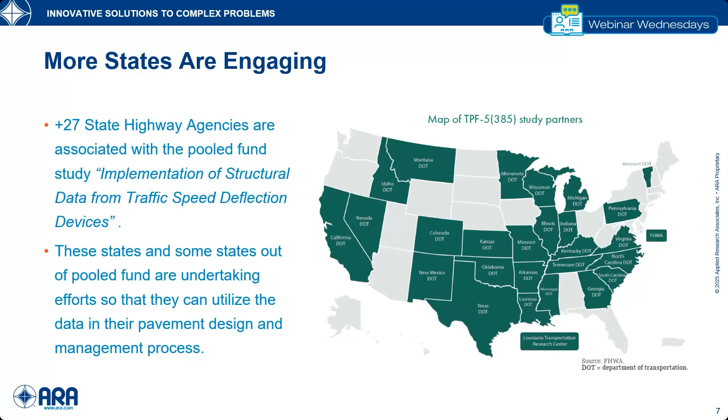So TSDD, the pooled fund study is out there, and many states are now engaged with the pooled fund study to use the data for different purposes, mainly for network level and structural evaluation of the pavement to support pavement asset management, and also investigating ways to support the pavement design processes. Many states have already joined the pooled fund, and other states are investigating the capacity and possibility of using the data for different purposes, including those states outside the pooled fund.

ARA is now providing TSDD data analysis support in different states. In Texas and Georgia we have provided support, and Illinois, Ohio, and Michigan DOT are ongoing projects that we are dealing with.

Before going to the data applications and use cases of the data, I would like to go over a couple of fundamentals of the TSD data, basically to make sure we understand the TSD data properly. A brief introduction on those aspects. Deflection data. We are looking at two cases here in these slides.

In a case study in Illinois, we are looking at two sections of the same road, a few miles away from each other. On the left side, we are looking at a distressed section, but not as distressed as the screenshot on the right side of the slide. If we look at the deflection and distresses in these two sections, we'll learn more about the structural capacity of these two sections.

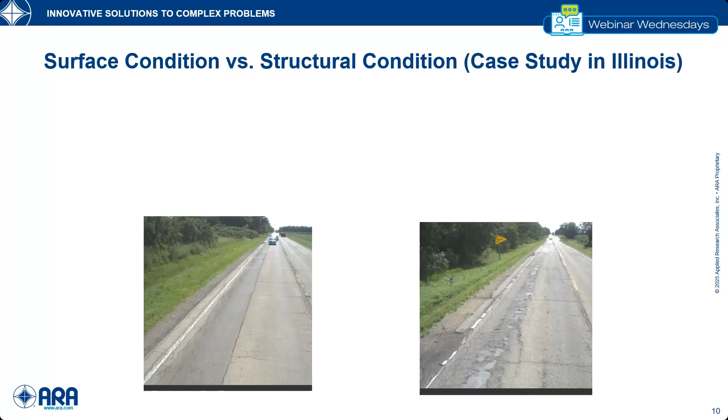So the maximum deflection is on the top of the slides for these two sections. The section that is more distressed, on the right side of the slide, actually has a much lower deflection value. And the section on the left side, with a better surface condition at least, has indicated significantly more deflection, more than 10 times actually.

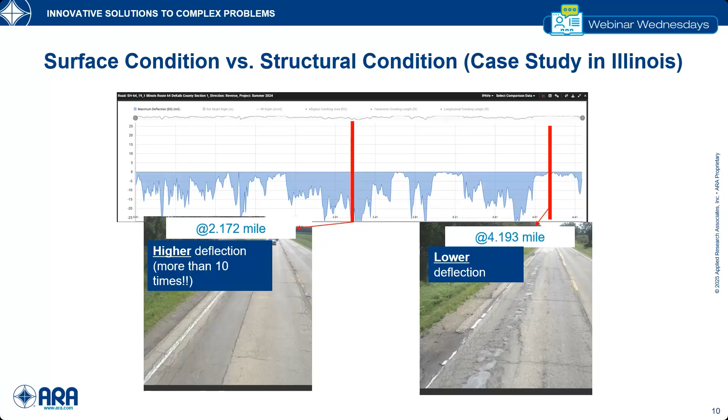So in summary, the surface distress, as we all know, doesn't tell the whole story about the pavement structure within the depths of the pavement. So it's really important to look at both deflection, structural information, and also surface condition. But how is the data measured, how is the data reported, and what does the TSD data mean?

Traffic speed deflection devices, such as the TSD that we are looking at in these screenshots. There are different TSDDs by different vendors available in the US. We are looking at one example here. It is basically collecting the deflection-related parameters of the pavements. There are Doppler lasers installed that beam near the truck rear axle, on the right side of the axle, and it is actually measuring the deflection velocity data.

And in this specific equipment that we are looking at, there are multiple parameters that are also calculated and reported, such as the surface condition data coming from the LCMS lasers, and other information such as the right-of-way images, all integrated into a platform called Hawkeye. This information can then be used for different purposes.

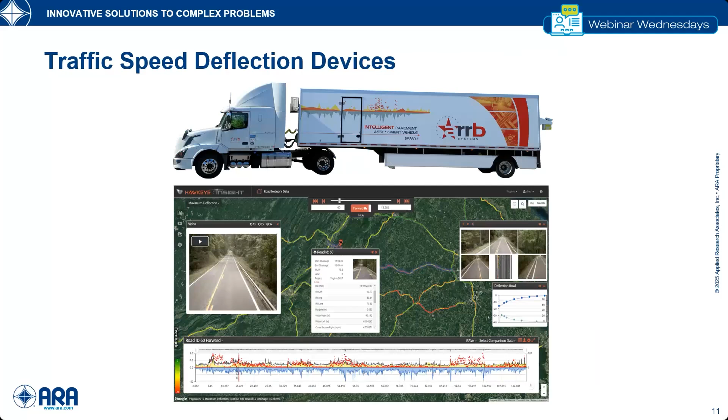But let's take a little deeper look at the data and how deflection slope is measured and reported. TSD or TSDD measures deflection velocity, the speed of the deflection that is happening under the load on the pavement. So TSD doesn't measure deflection directly. Deflection velocity is measured from the TSD, as in the screenshot on the bottom of the slide. The Doppler laser is measuring the velocity in the vertical direction, and there is another component, the horizontal speed or vehicle speed of the moving truck.

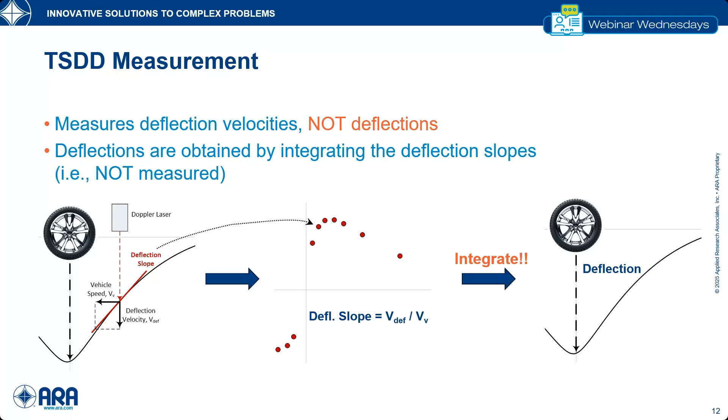And then the slope of that deflection basin is considered the deflection slope, which is the deflection velocity divided by vehicle speed in the horizontal direction. Then, using some assumptions and a mathematical approach, there are ways to come up with the deflection basin, to provide an estimation of the deflection basin. But looking at the raw data, deflection velocity and deflection slope, what does it tell us and what do we expect to see from the TSDD measurements?

Here we are looking at the typical or expected deflection slope and deflection basin on the top and on the bottom of this screenshot on the left. Our expectation is to have a positive deflection slope in front of the axle and a negative deflection slope behind the axle. The reason is that we expect lower deflection values far away from the axle, far away from the load center, compared to the closer offset.

And what if the deflection is not showing this expected shape? This can be one example of unexpected deflection slope, with negative deflection slope in front of the axle. But what does it mean? If we use our imagination, the negative deflection slope translates into non-decreasing deflections, theoretically, meaning that deflection far from the load has a higher magnitude than deflection at a closer offset to the load center, which is not expected. It can happen for several reasons.

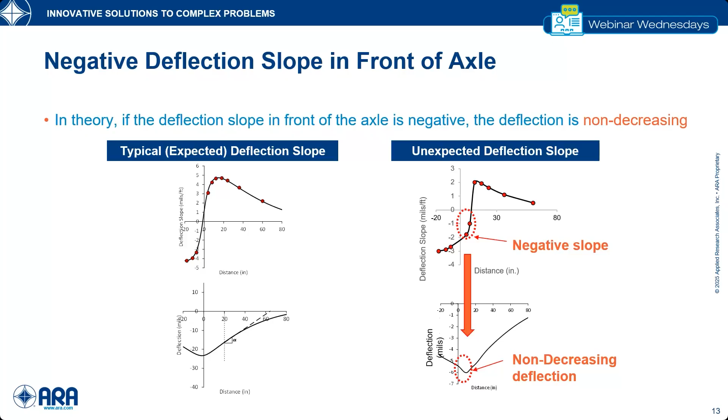So with that brief background about TSD data measurement, the fundamentals of the measurements, and how data is reported and integrated, we took another step to devise a quality assessment protocol to evaluate the quality of TSDD data. I'm showing the ARA proposed process for TSD data quality check and quality assurance. The first step starts with the linear reference check: whether the data collected are tied to the inventory of each state and that referencing is done correctly, meaning road names, lane, direction, and all GPS information are correctly reported and tied to the data. That is really the basic step to make sure the data is reported at the correct location.

The next step starts with reviewing the raw deflection slope. Since the deflection slope is really the raw data coming from the TSDD, we put high emphasis on reviewing the raw data directly. Our steps start with simulating different pavement sections to get the deflection slope for different case scenarios, comparing the raw and calculated deflection slope reported in the database, and using that information to identify unexpected slope shape and value, both in terms of the shape of the responses and the value of the response.

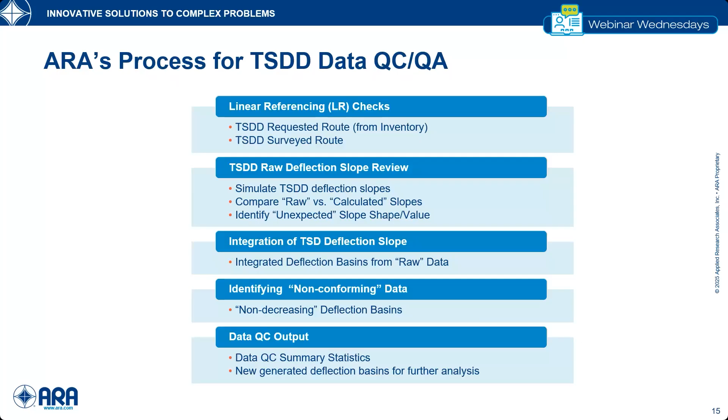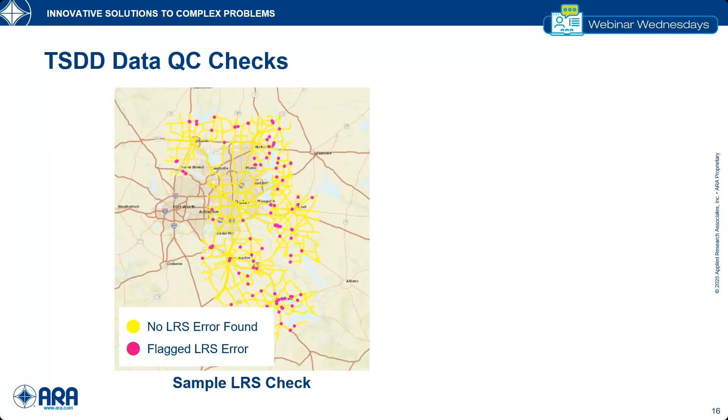This is showing one example of those kind of checks. Here in this picture or screenshot, we are looking at the linear reference checks and issues, flagging the entire area that was tested in this example, with pink points showing the flagged areas or potential errors, and yellow points or yellow lines showing where we didn't observe any errors. By those errors, we're referring to if the road names, milepost, lane, direction, and other location features are mismatched, and there is a discrepancy between what was supposed to be collected versus what was collected, to identify those flags and recommend correction or further adjustment.

By unexpected data, I'm not referring to right or wrong. Really, what matters here is whether it follows our expectation. What we expect from the data, and the data shown is not really following our expectations. So this is an important step towards increasing our knowledge about the TSD data itself.

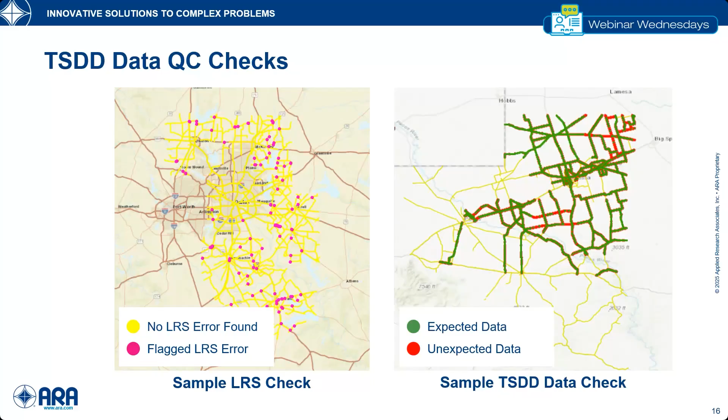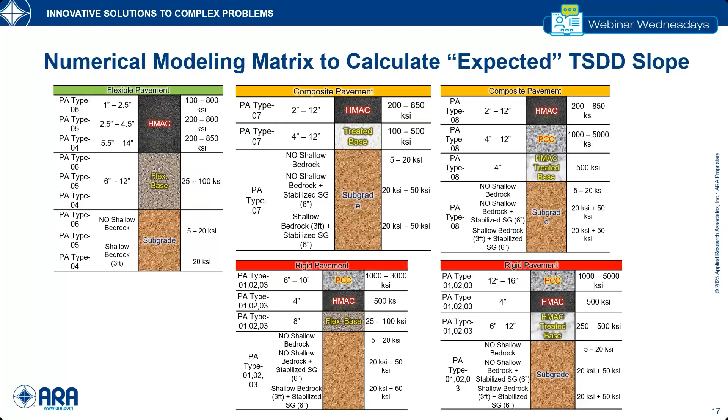This slide, I'm not going to go through the details, but this shows one example of the numerical modeling matrix that we use to calculate those expected TSD slope data. We used different pavement types with different ranges for different layers, different thicknesses, different layer moduli for different layers of flexible pavement, different types of composite pavement, asphalt over concrete, and different rigid pavements were simulated, a relatively wide range of cases to consider both extreme cases, lower end and upper end of those kinds of spectra, to capture both cases and come up with values that can be within the expected range of the deflection slope response. Then that would be used for checking against the deflection values.

This slide shows one example of the TSD data checks I was performing in Texas. Different QC checks divided by main category and subcategories in terms of if sensor recording signal, if raw data was not corrected or was the same as calculated data, expected the slope shape, if the slope shape in front of and behind the axle is showing as expected, and deflection value coming from different ways and approaches, from the area under the curve, from ARRB method, Greenwood method developed by Peterson, or the deflection coming from integration from raw data, and also information on the temperature of data collection, if it was within the accepted or instructed range, and at the end, what portion of the data is conforming to our expectation. In this example, 96.8% of the data were within that conforming range of values.

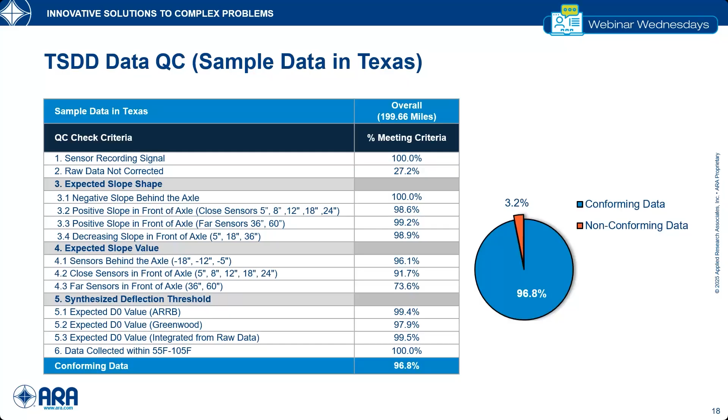TSD raw data plots. There is an ongoing development here to visualize the quality checks. Once we do the quality checks, how can we visualize the data? This is really the preliminary step of this task, an ongoing initiative at ARA for showing the data. In this example, we are looking at the blue data points, TSD raw data points that we didn't identify any issues with, and orange or red data points with some sort of possible issues that didn't pass our QC checks. So the main purpose here is to look at the details of each pavement and each roadway type, using those design drop-down menus on top of this tool or plotting system to identify the source of possible error in that specific roadway, to guide us in understanding the data.

So really the next step of this entire initiative is to put this information in a platform that we can look at, go to that specific data point, and identify the location with right-of-way images, with other information coming from the Hawkeye system, merging this information together to find the areas that can be problematic or can have possible errors, to guide us to better understand the data in a more meaningful way.

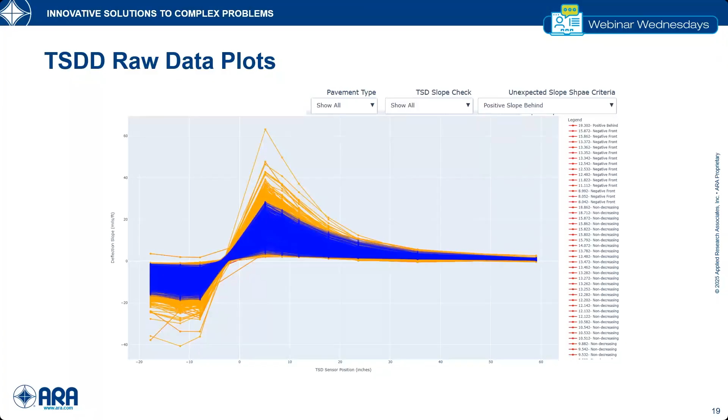Incorporation of the TSD data into pavement ME design is another initiative that we are following. It's really at the early stage.

TSD data has been used for network level pavement analysis in many different cases. There are some applications of TSD data for project level analysis, however there are limited cases and examples. There is no standardized approach to use TSD data with pavement ME design for project level analysis. That needs a lot of investigation and calibration or adjustment to the process to address the unique features of the TSD data. The loading mechanism and processing process are completely different from other NDT approaches such as FWD. That needs to be captured and properly addressed when we want to use that approach.

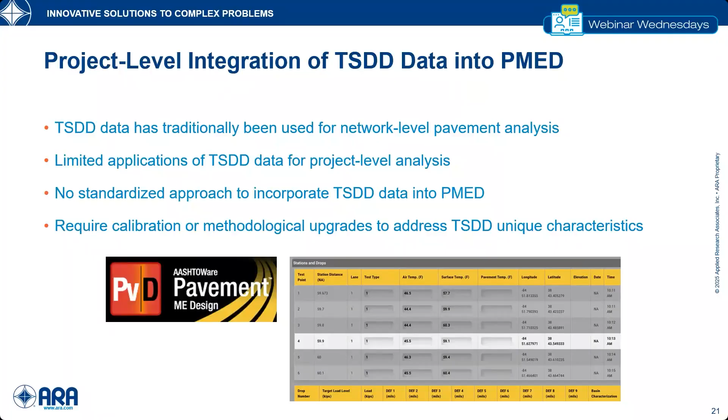But we did a preliminary comparison to see how that can be used, and what is the possibility of this. We used different approaches using pavement ME back calculation tool, modulus software, and ELMOD software, to explore the feasibility of using different tools for back calculation of TSD data and compare it with FWD data.

The first bar in this chart shows the FWD back calculated modulus using modulus software. This specifically shows the back calculated subgrade layer modulus. We want to show how they compare for subgrade modulus, which is an important parameter in different designs.

We are seeing the data is really different with different methods used. We are looking at a very high range of changes using different methods. With TSD data, the back calculation tool versus modulus versus ELMOD, they are really different from what we observe from the FWD back calculation modulus.

We tried to refine the data again and use the data another time, performing the QC first. So this slide shows the result before doing the quality checks, and then we repeated the analysis but with performing the QC checks. The results were in better agreement with FWD, not exactly the same, but we could see better agreement for that specific case study.

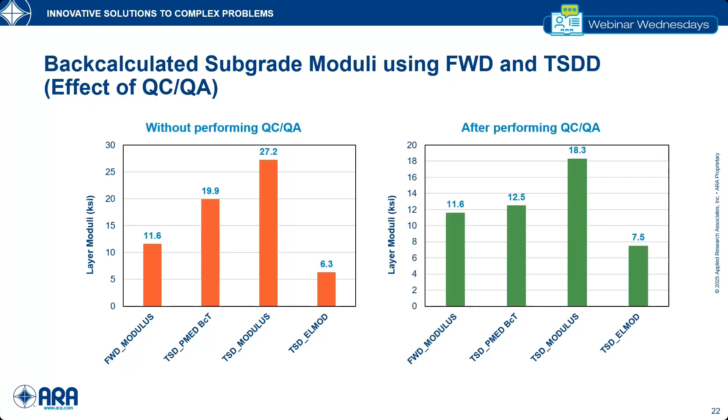To further advance the back calculation, we took the challenge to take it to the next step of how we can specifically consider the features of the TSD, the dynamic loading conditions and different sensors that we have, 11 sensors in the newest version of the TSD that we have used, and how we can consider that information as well as viscoelastic behavior of pavement and other frequency and temperature dependent parameters of the asphalt layers or flexible pavement layers.

So our TSD expert at ARA, Hyung Lee, developed a tool called DSteele, which is our in-house tool for performing that calculation. This is still being upgraded by Hyung, and we are seeing a screenshot of this tool here.

Basically you can define your pavement structure, different layers and different thicknesses with different parameters and coefficients to capture the viscoelastic parameters, with deflection slope calculations, deflection velocity calculation. So it's pretty dynamic and pretty efficient for doing the calculations of the responses under TSD load.

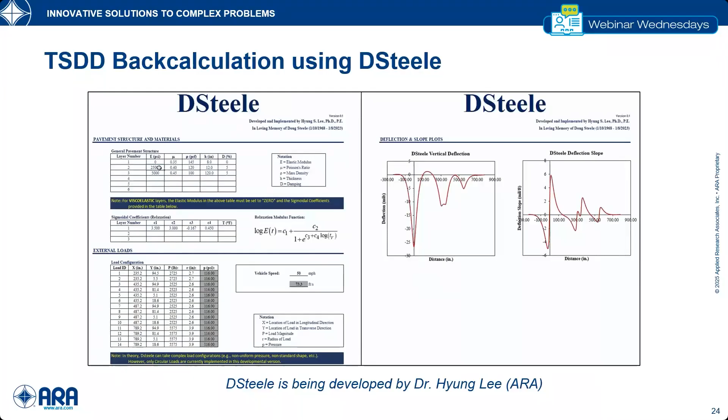How can we use TSD for back calculation? First we need to understand how the data and deflection slope is provided to the end users. There is deflection slope, although it's called raw, it's not 100% raw. There is a sensor reference measurement that is roughly 3 meters away from the load center line, 121 inches. That measurement is subtracted from all other deflection slopes, and that is reported as the raw deflection slope to the end user. So that is the deflection slope reference that we are going to use.

So the purpose is really to find the matching layer modulus for that defined pavement structure, to get the matching responses from TSD or from this modeling versus what is reported or what is measured.

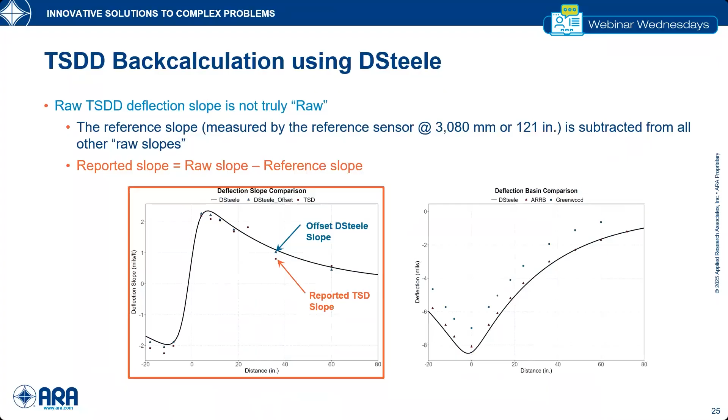In the plot on the left side, we are looking at that kind of process. We are looking at the deflection slope that is offset deflection slope, which is equal to deflection slope at that specific sensor subtracted from reference slope. The purpose again is to get them as close to each other as possible. In this example, this has been done for deflection slope and deflection basin, and our deflection data showed better agreement with the DSteele simulated or back calculated deflections versus the other approach, or Greenwood deflections that is reported.

Looking at further details, back calculation versus integrated deflections, we look at a couple of sections in one case study in Texas, examining two different types of sections. The first example deals with a less stiff, less robust pavement structure and thickness, looking at how integrated deflection compares with the back calculated deflection.

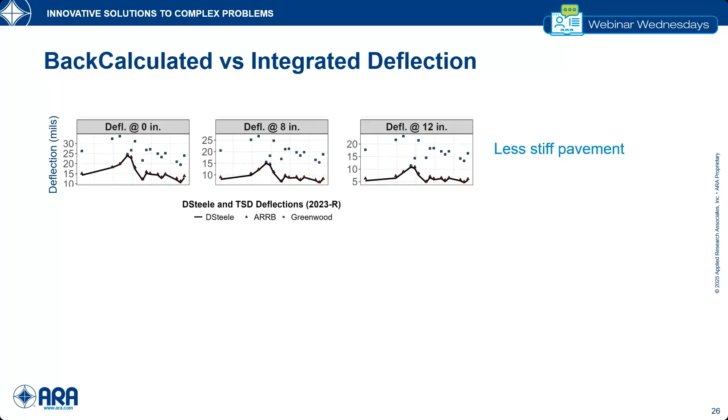Again, we are seeing better agreement between the deflection from ARRB with DSteele back calculated deflection. In a stiffer pavement, it was a little different trend. It was more challenging to get matching deflection from what is back calculated at this stiffer pavement, and it was the same type of situation for both ARRB and Greenwood.

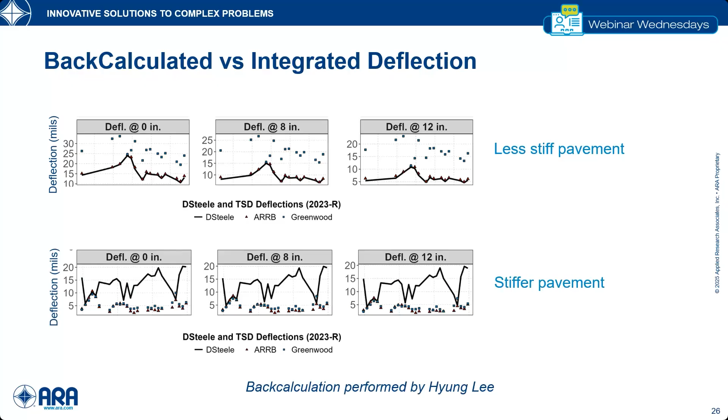The back calculated deflection really didn't match with what was reported. Another example of back calculation, based on mileage, where we had both FWD and TSD data, looks at base layer modulus, flexible base back calculated modulus, and subgrade soil back calculated modulus. The blue points show where we had TSD data, and orange points show the FWD back calculated layer modulus obtained from modulus software, with TSD back calculation done using DSteele.

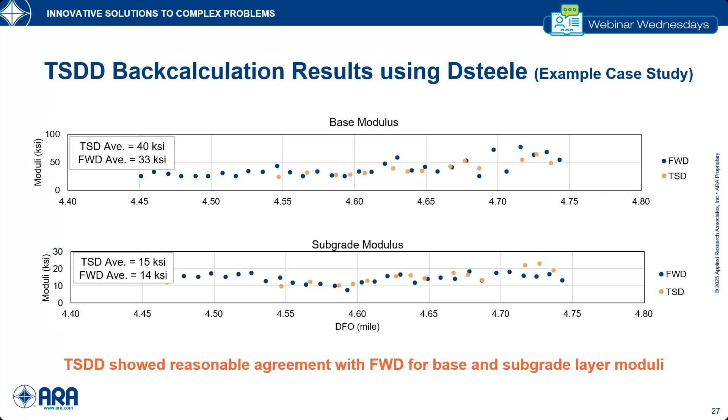We saw in this specific example reasonable agreement between FWD and TSD for base and subgrade layer modulus. Specifically for subgrade modulus, it was following the same trend with the overall average, very similar to each other. We haven't observed the same type of trend for flexible pavement or asphalt layer back calculation modulus, and it was not matching with what you're seeing in flexible pavement in that example.

Moving forward with one case study in Illinois on the use of the data to support project scoping and how the data was used. That's a different scale. We look at Illinois 17, Kankakee County, 6 miles of data, 7.5 million ESALs, 20-year projected ESALs, with 4,882 AADT. TSD and 3D GPR data were analyzed to support the project scoping.

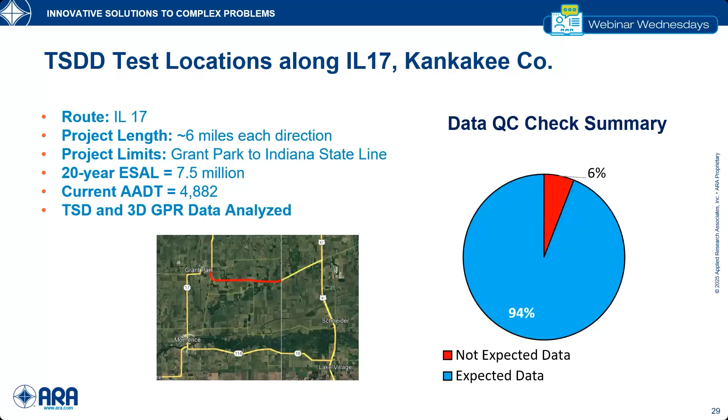We are dealing with relatively older pavement, and the purpose of that project was to use the data to guide the project scoping. In terms of quality checks, 94% of the data were passing our checks and came up as expected data. So we took further steps after doing the QC.

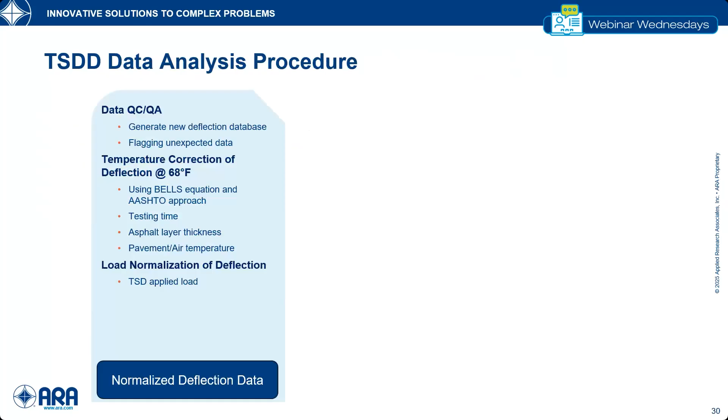We did our process for temperature correction using BELLS and AASHTO approach for temperature correction, and load normalization of deflection based on different loads. Different indices were calculated for different layers to capture the structural integrity of those layers. Then we used available information in terms of traffic information and layer thicknesses coming from the 3D GPR as well as the TSD deflection and load.

We incorporate that into the recalibrated Rohde equations to calculate the existing structural number and compare it with what is required, the design structure for that specific section, and came up with the structural condition index comparing those two measures. Sections with a structural condition index lower than 1 would suggest a need for structural improvement.

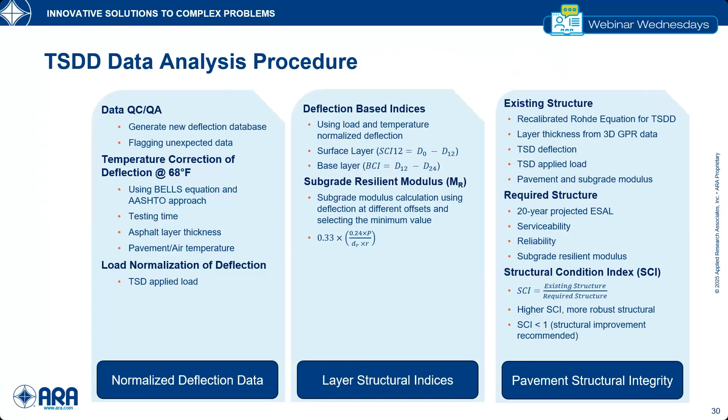So a specific type of consideration we incorporated into our analysis: we use the raw data instead of the calculated data to come up with new sets of deflection data that pass the quality checks, with all other information coming from site-specific information from 3D GPR data.

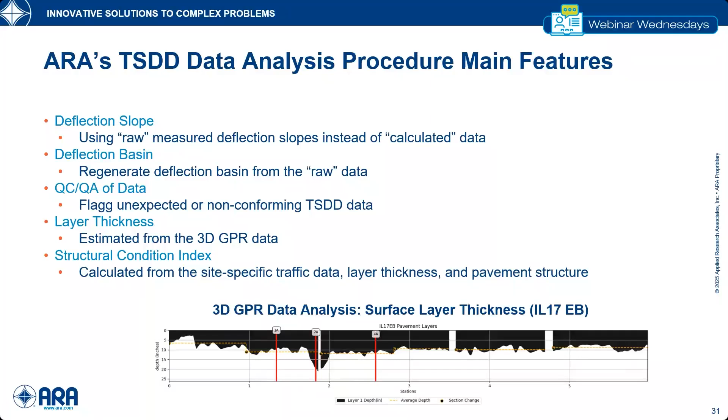We are looking at a screenshot of the result at the bottom of the slide that shows the surface layer thickness for that section, and we considered all the information including traffic data, reliability, and other features of the pavement to come up with those calculations.

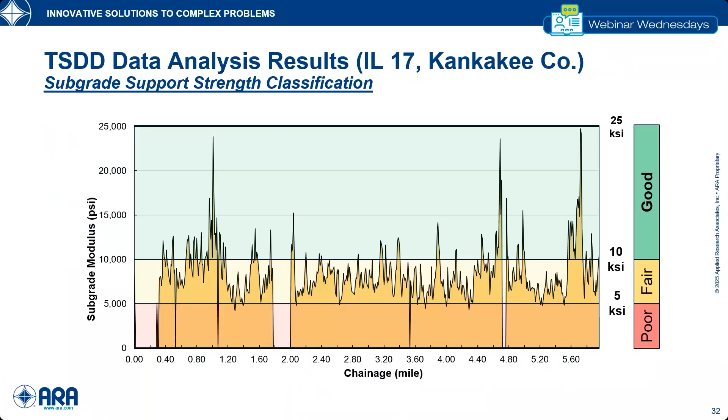In terms of subgrade support strength classifications, we look at how the subgrade can be categorized into different categories of poor, fair, and good, to get a sense of the condition of the subgrade. For most sections, they're classified as fair, with some limited areas of poor, and some scattered points or locations classified as good structural capacity in terms of the subgrade.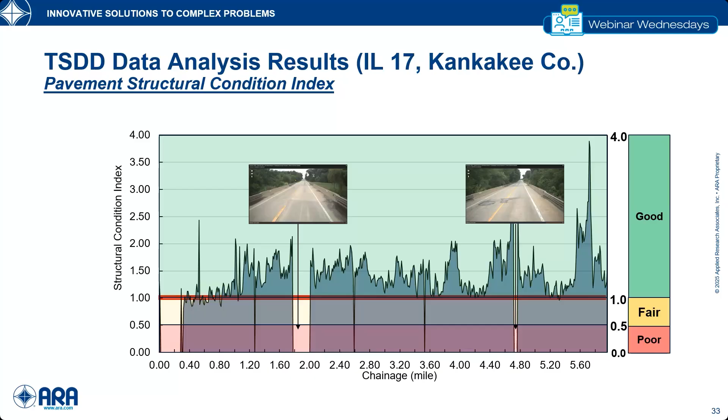This is a specific example analysis, and the majority of pavement sections were classified as good in overall pavement structural condition in this example, with some areas having a structural condition index lower than 1, classified as fair condition.

Looking at the surface condition data and the status of these sections, the pavement was cracked with low to moderate rutting and a condition rating score value of 3.2, which was considered poor surface condition based on the guidelines. And there were a lot of cracks. If you look at this example, in the middle of these cracks, the question was, are these cracks load related or not?

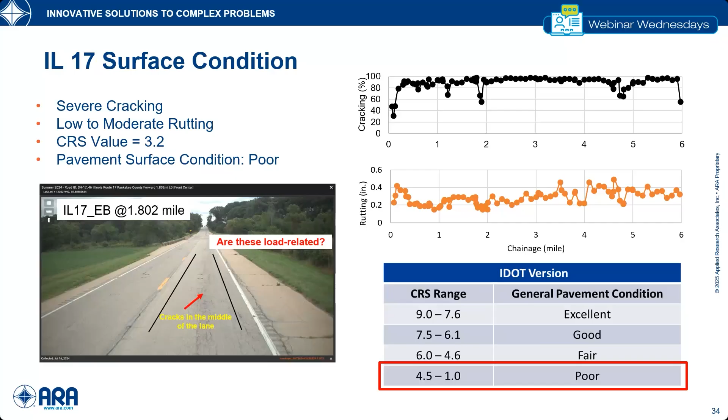We looked at the 3D GPR in more detail, and we realized there's concrete underneath, and that can contribute to the development of these cracks in the surface. In the next step, we looked at the current guideline of Illinois DOT for treatment category selection based on the CRS value. This project, with a CRS of 3.2, was basically a candidate for the whole replacement of the pavement, placing a new asphalt or concrete pavement on top.

Using the TSD and 3D GPR data, we realized the structural adequacy of the pavement is not within the range that suggests the need for pavement reconstruction, and maybe a rehabilitation instead of a reconstruction is a more suitable approach to extend the service life of these pavement sections.

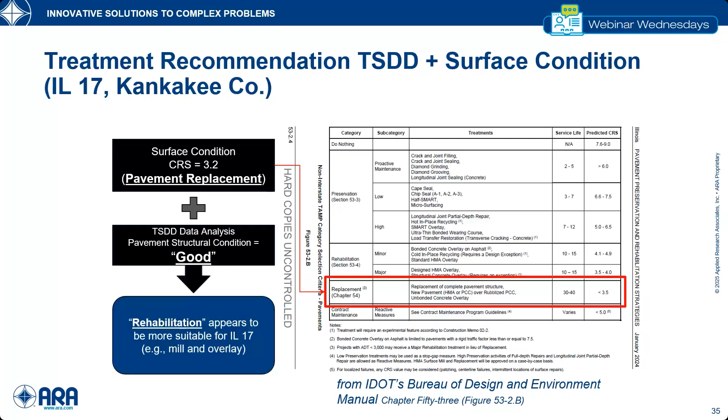In the case study in Texas, we looked in a little more detail at the data variations, basically looking at the current practice used for the data analysis, and looking further at the details of the data, how the data are performing in different types of pavement. So we looked at FWD data in the sections where we had TSD data as well, and we did the segmentation into 5 different segments based on that data.

We are looking at DSI12, which is basically the deflection at the load center line minus the deflection at 12 inches from the load, as an index for doing the classification or segmentation, and also subgrade modulus. So we came up with 5 different sections with stiffer and less stiff pavement. Segments 1, 2, and 4 are relatively stiffer than segments 3 and 5.

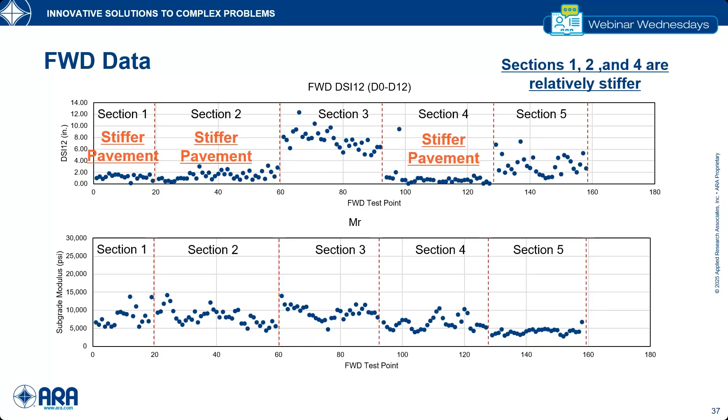But let's take a look at the performance of the TSD in different sections. In this example, for sections 1, 2, 3, 4, 5, we looked at the deflection slope in those specific sections, which shows more consistent values in that section. We tried to calculate the coefficient of variance in each section to capture the variation of the data along that section. What is the coefficient of variance of the deflection slope within that section?

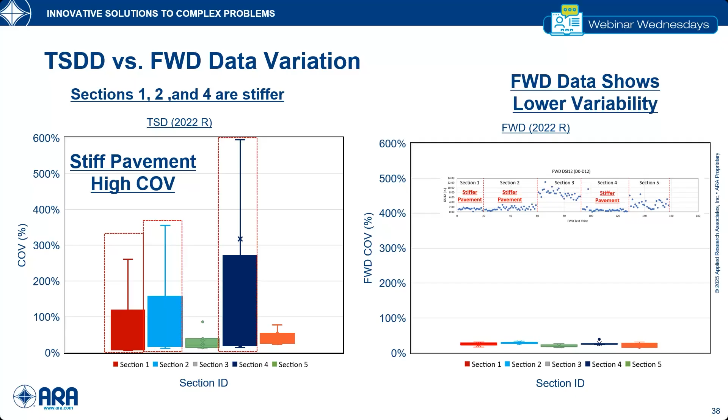And we realized that higher coefficients of variance were observed at the stiffer pavement, as we saw on the left side. We compared that with FWD data for the same sections, with the data collected at the same locations. We were seeing significantly lower coefficients of variance from the FWD data, regardless of the pavement stiffness. This showed us that when we are dealing with stiffer pavements and collecting TSD data, data quality checks are really important to look at further.

In the comparative analysis for structural number calculation using different methods, we looked further to see how different approaches, and the different constraints that come with them, are reflected in the calculations. We used the AASHTO approach with TSD data and FWD data for comparison, and used the Rhode equations, both the original and the recalibrated, to come up with that comparison.

What we are seeing here is that the FWD data with the AASHTO approach serves as our benchmark for the comparison, and we tried to see which other approach using the TSD can result in similar values. We saw better agreement using the modified or recalibrated Rhode equations proposed by FHWA, which really agreed better with the FWD reference results.

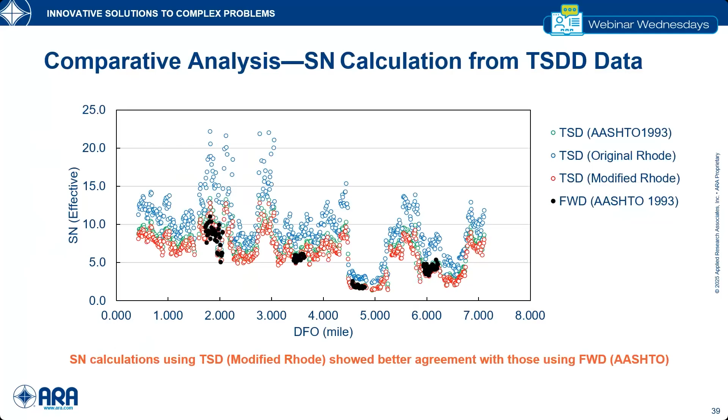So the next step of this process is to incorporate the data into pavement management systems. How we can use the data in a more meaningful way to support pavement asset management, using the correct indices based on different states, their conditions, different environments, climate, and different pavement types and conditions.

So in terms of the application and use of the data, to summarize, what are the applications of the data at network level: identifying the structural treatments from the TSD data, and then incorporating the data into the PMS, pavement management systems, to kind of complete these pieces of the puzzle, with the structural inputs coming from the TSD and surface condition from the current PMSs, to upgrade and update their maintenance and rehab treatment activities for

more meaningful treatment selection. At project level, the applications and uses of the data are basically to generate design inputs and come up with TSD indices that can help us identify a specific layer that may not be performing, or a structure not performing well, and also doing back calculation to again support the design. The project level analysis of course needs more attention, more knowledge, and a greater amount of effort to make it happen.

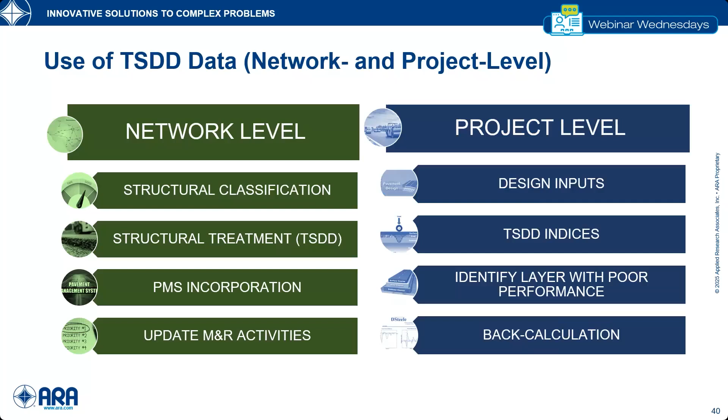Again, there's ongoing work on this in ARA internally, on how we can take this to the next level for using the data to support design at project level. So to wrap up what we discussed, our ongoing initiative is back calculation of layer moduli using an ARA in-house tool with TSD. This is in enhancement mode right now to increase our capability to support the design. Integration of TSD data into AASHTO Pavement ME can be really beneficial, and that is the initiative we are following to support the design of pavement sections.

And the other initiative that was not covered in this webinar due to the time restriction was understanding and application of the TSD data, especially for rigid and composite pavement. There has been work done in rigid and composite pavement analysis. We are trying to understand and leverage those experiences to take it to the next level, which needs a really significant amount of effort and understanding to make it happen. Especially the understanding of the composite pavement, because the PCC layer overlaid by asphalt brings extra complexity to understanding the data and the performance. So these are the highlights of our ongoing initiatives that we are trying to use to advance the current state of the practice.